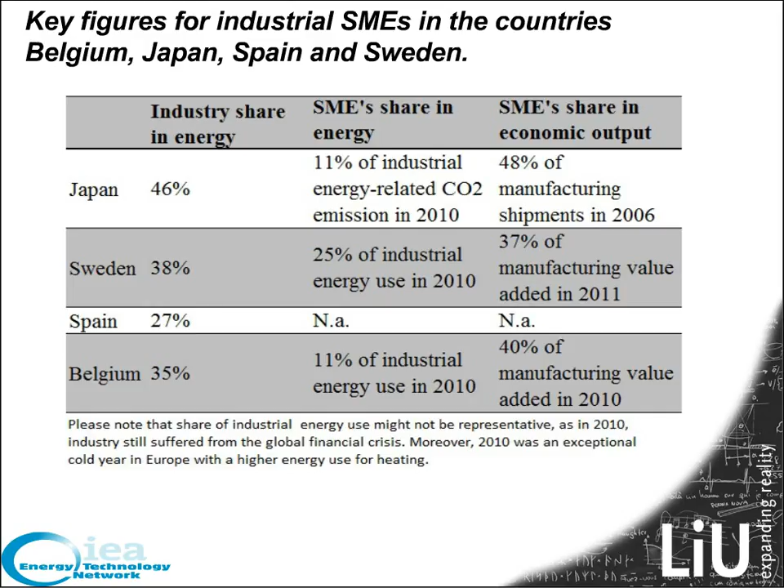So there is a great energy efficiency potential in industrial SMEs. It's even greater or larger than for energy intensive industry, even though the energy intensive industry in most countries has a larger energy end use. So the potential in SMEs is higher. That's what research shows. I have not provided you with a figure here.

We know that the European Commission states 25% in their action plan, and colleagues of mine have papers written in Sweden and internationally about various figures, but I will just say that it is high. But the potential is high, while the implementation of energy efficiency in industrial SMEs is not as high. So there is a discrepancy, a difference between the potential and the level of implementation or the deployment level.

This is something that is often missed in general, not only in regard to SMEs: we engineers like me speak about potentials and then assume that we can reach the whole potential, but research doesn't say that we can reach the whole potential. Normally in energy audit programs for SMEs, we can reach 50 to 60% of the potential outlined from the audit reports. But anyhow, there is a difference between the optimum level of energy efficiency and the level we have today, and this is what is called the energy efficiency gap.

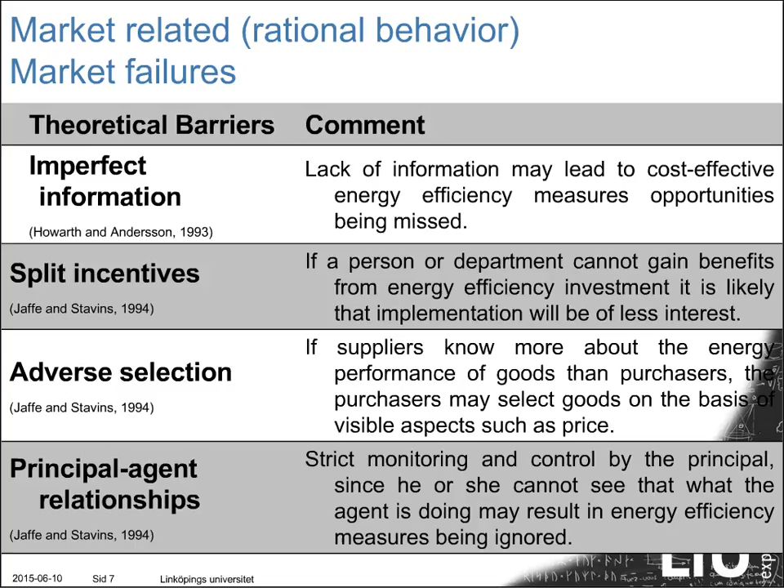Then we have a principal-agent relationship. If you allow me another example of you and me: if you're the owner of a company and don't really trust this CEO, which is me, because I put too much money on company partying and so on, you put in strict monitoring rules and say you're not allowed to take any investment above a 1 year payoff. This, of course, inhibits investments in energy efficient technologies. So those are the 4 market failure barriers in relation to improved energy efficiency.

If we go to the non-market related barriers, we have heterogeneity, which means that when we do a potential study of a technology, for example LED lighting, we tend to miss that the application for this technology is not applicable in all cases. This means that sometimes the potential level we state, based on a top-down calculation, is not as high in reality.

Then we have hidden cost, which means that when we undertake an investment, there are costs allocated to it which are not only the investment cost. It could be search costs for information, analysis of information, procurement, etc. Those costs can be quite high, and this is also a factor that can inhibit investments in energy-efficient technologies.

Then we have access to capital, a primary barrier for industrial SMEs. Not much to say about that - if you don't have money, it's hard to invest.

But the last barrier, risk, states that sometimes the lack of access to capital can be self-imposed, because industrial SMEs tend to be more risk averse than other larger companies. Also, sometimes when it comes to energy service companies, ESCOs, that make an agreement with an industrial SME, we have seen in research that it can be difficult for the SME to be credible towards the bank, because it's not the multinationals that come and ask for money. So the bank sometimes gives a neglect of allowing for the ESCO because of risk. This is also a barrier for energy efficiency.

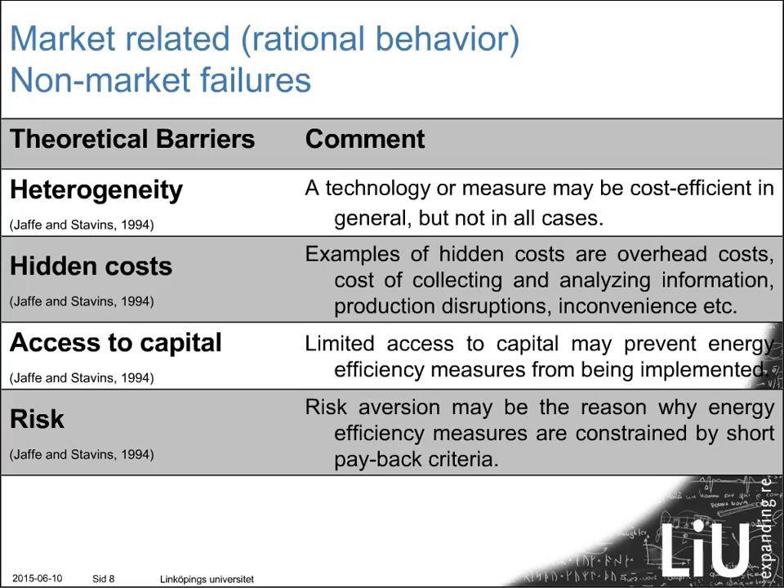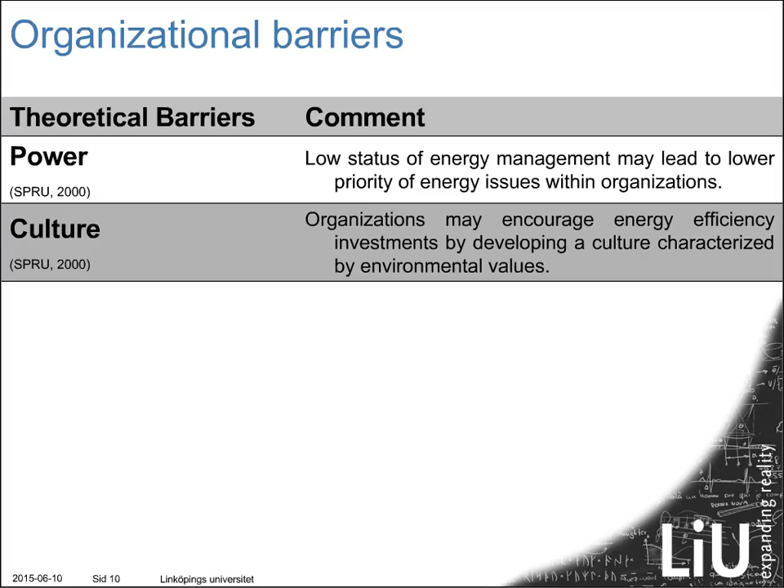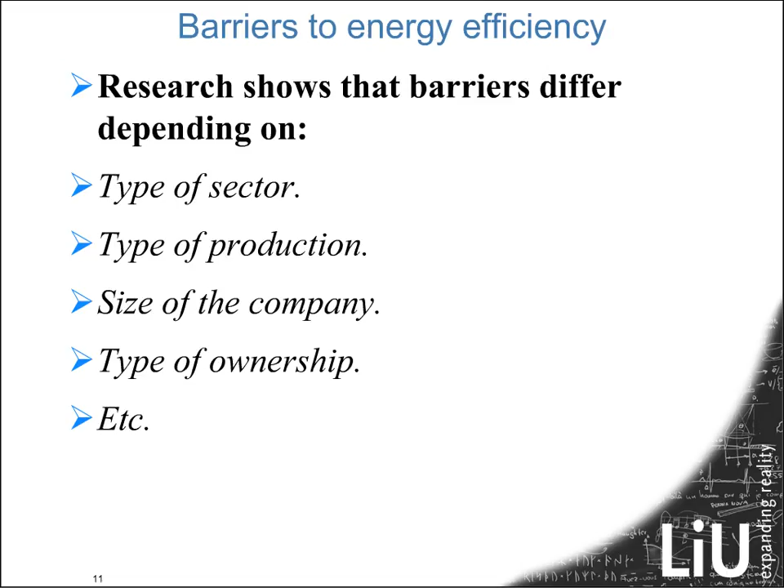So that was the theoretical barriers for improved energy efficiency. Now, I could provide results from various papers from international colleagues and ours here in Sweden, but I'll just summarize that research shows barriers differ a lot, depending on sector, type of production, size of the company, and type of ownership. I have still not seen a paper, and it could be lack of knowledge on my part, that summarizes the key barriers, period, for industrial SMEs. They tend to differ.

Before we leave the barrier part of the webinar, I want to mention something about energy efficiency in core business. From a Swedish perspective, the core business notion came into industry about 25 years ago. What not so many know is that the core business focus is actually based on a research paper by two American researchers back in 1991, stating that if we are to improve and succeed in our company, we need to focus on our core business. In relation to core business, improved energy efficiency in a manufacturing industrial SME can never, per definition, be core business, because it does not create any revenue.

This doesn't mean we can't put it on top of the agenda, but we have seen that this strong emphasis on core business can sometimes harm improved energy efficiency in a company, because parts that are not core business can be outsourced. And if you outsource one key person who knows the technical energy system, we have a problem improving energy efficiency.

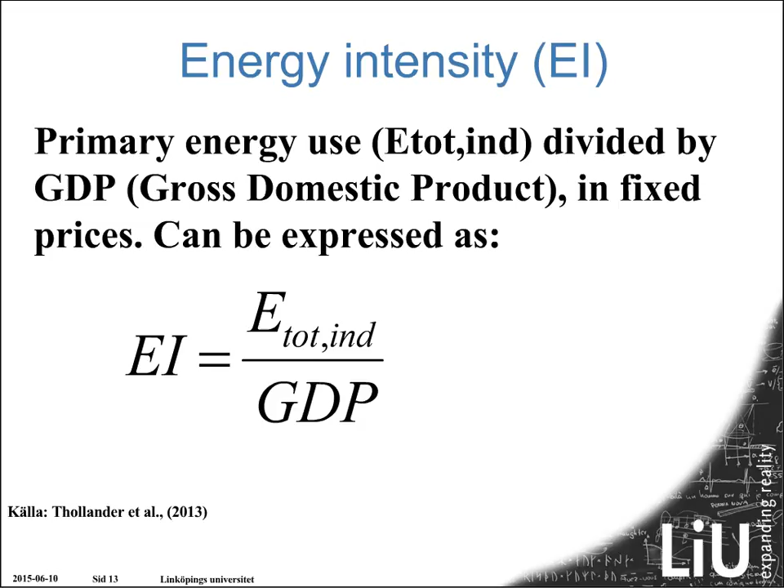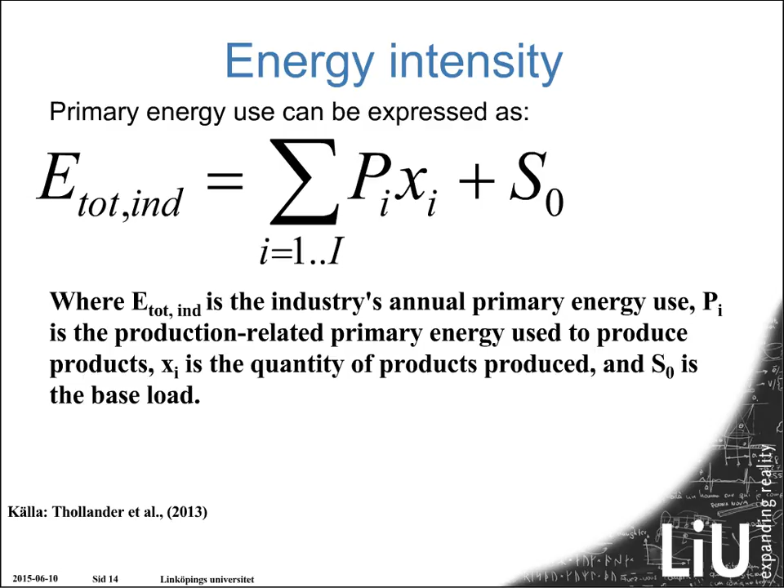And if we look on the total energy use, we can exemplify this by a simple equation, and don't be shocked by the numbers. It basically means that the industrial energy use is the production process energy use per product, and then we have a term S0, which means all the support processes.

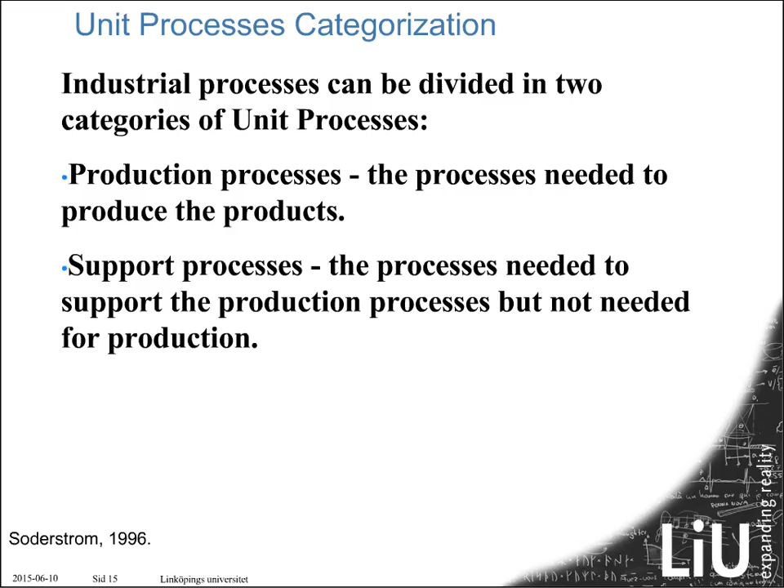And when looking into this type of categorization, the production processes are the processes needed to produce the products, and then we have the support processes, which support the production process.

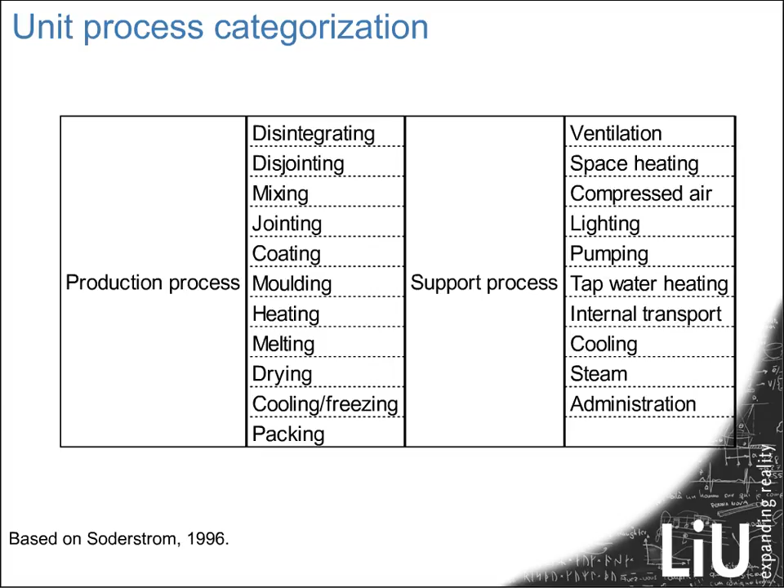And this categorization can look like this, where on the support process side we have a number of defined support processes, and then we have theoretically tried to make a list of typical production processes. I don't want to give emphasis on this, but just show that we can categorize the various types of processes in a company, and that the energy use of a company is both production processes and support processes.

If we look here, we have an engineering company, an SME, and on the very top part of the figure we see that metal cutting, CNC machines, is about 22% of the total energy use. And then we have the phosphate finishing at 1%. So in this company, the total annual energy use primarily consists of support processes.

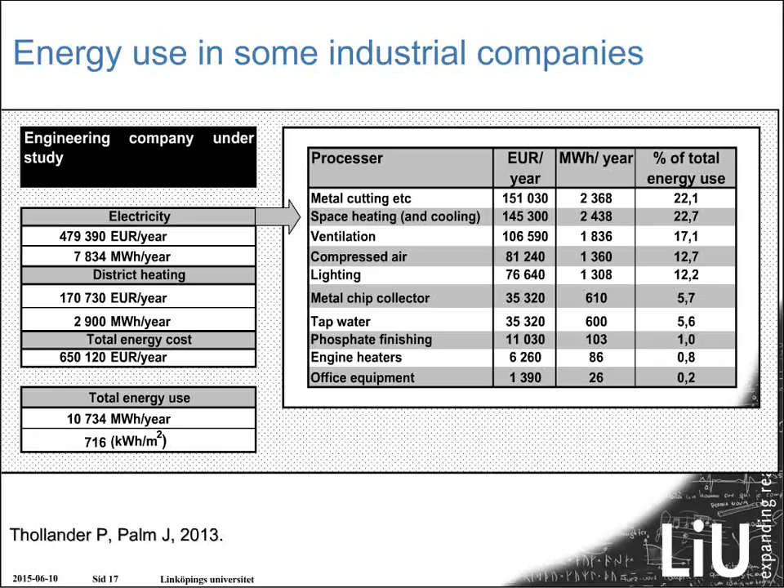If we look at a quite energy-intensive SME here, a foundry, we can see that about 50% of the annual energy use is from the support process, and about 50% is from the production process.

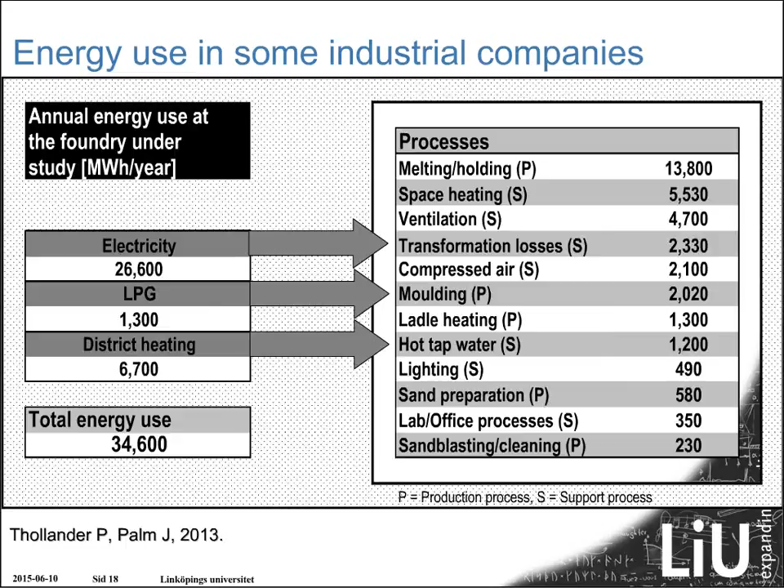And even though not on topic for today, we can see here an energy-intensive large pulp mill, a chemical pulp mill. We have the evaporator, the drying, the digester, and then others. Others is the only category in this paper where we have the support process.

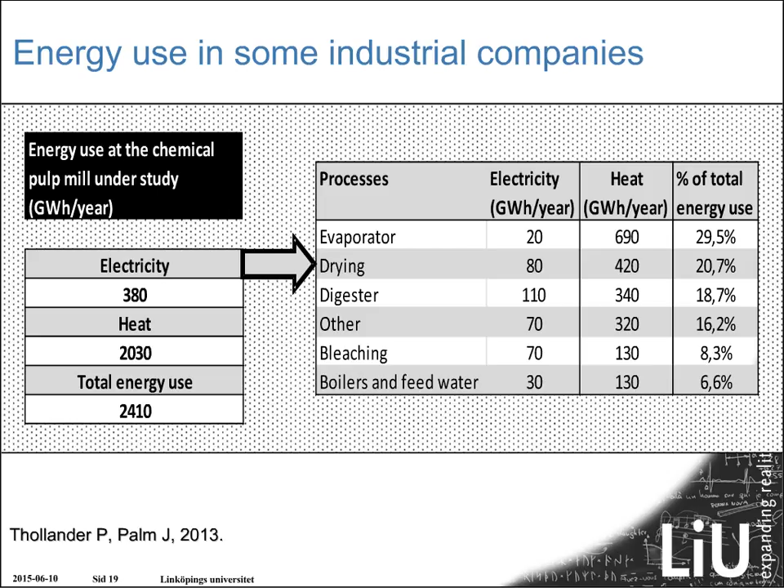So, having said that, if we remember the equation Px plus Sx, when the Px differs, the approaches also, of course, should differ. And I put in a little citation there, that we've succeeded in categorizing insects and plants and so on, but still categorization of industrial energy end use, which is, in my view, far less complex than nature, is still unexplored by us.

And in order to make an improvement in this regard, there should be a general taxonomy developed that could be applicable for industrial SMEs. Since there is a lack of this, we cannot compare data between countries and not even between regions, because the energy audits in one part of the country categorize one way, and auditors in another part of the country in another audit program categorize in another way.

So for today, I just want to emphasize that we need to develop a taxonomy in the future for how to categorize data. And because this data is lacking today, we have little knowledge actually of how much energy is used for industrial SMEs, for the production process, and for the support process.

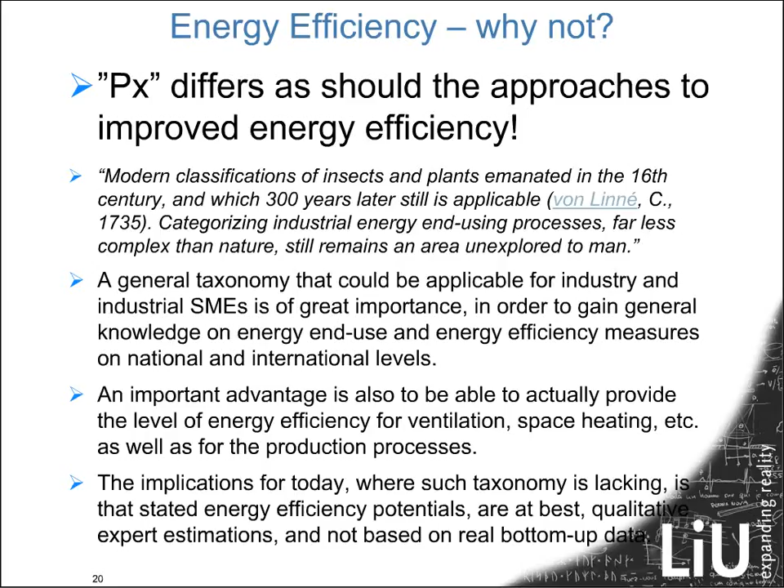And this means also, if you remember my first slide on potentials, we cannot really say how high the potential is, because we're lacking energy end use data, and we're also lacking implementation levels for various types of technologies. And this, of course, if you agree with me, we need to make a change in this regard. So let's aim for that in the future.

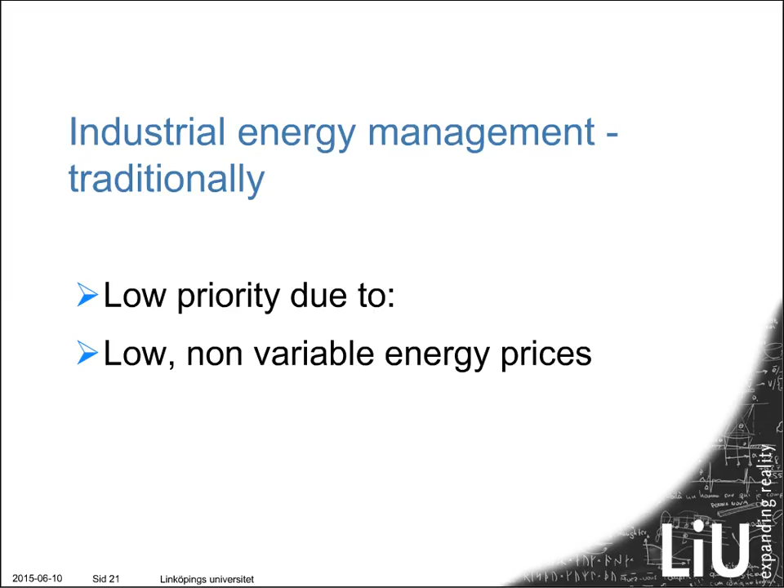So if we proceed on energy management, we can say that traditionally it has received low focus because of low, non-variable energy prices, and also that energy cost is in fact a quite small portion of the total cost for an SME. But today we have increased priority thanks to rising prices, even though that might not hold right now.

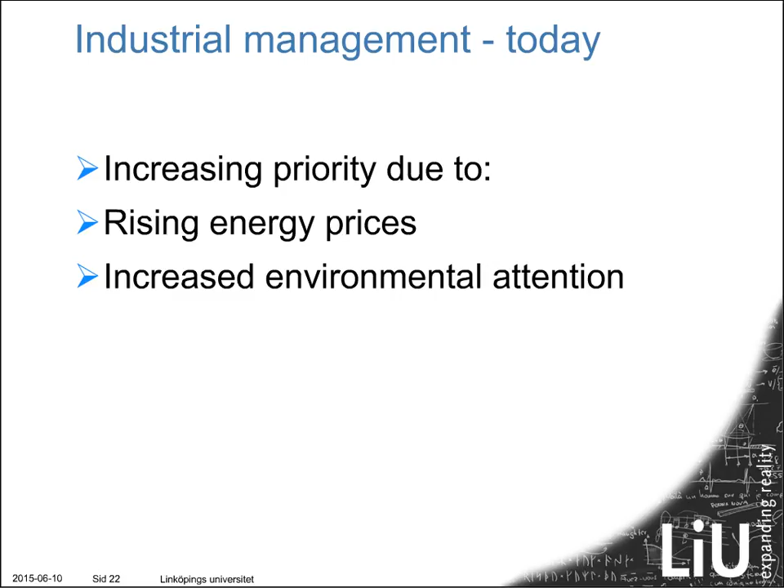We've seen historically rising prices, also increased environmental attention, and the adoption of public policy instruments, and also the new standards that have now risen, starting with Denmark, continuing with Sweden more than 10 years ago. We now have an international standard, ISO 50001.

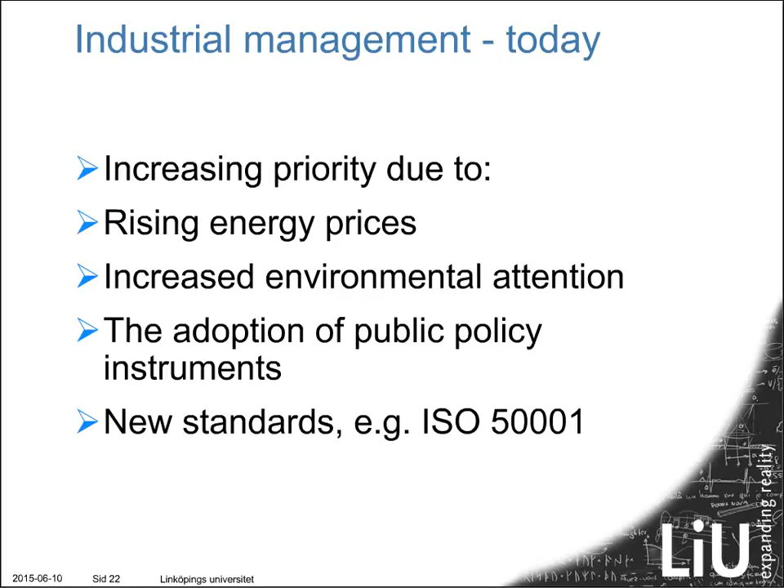Energy management is one of the foremost means to eliminate barriers to energy efficiency. There is not so much research done in this regard—about 40 to 50 internationally published papers in this area.

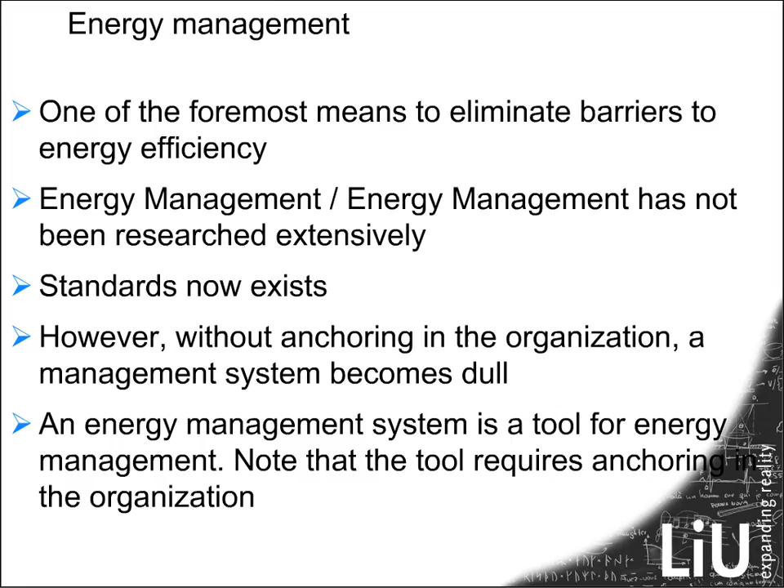We have standards, as stated in my previous slide, but please note that without anchoring in the organization, a management system becomes quite ineffective. I'd like to emphasize that an energy management system is a tool for improved energy efficiency by leadership and energy management. As an engineer, I often see this simplification: yeah, but we have an energy management system. This doesn't mean we have a good, successful organization working with improved energy efficiency—it just means we are certified. So please distinguish between an energy management system and successful energy management.

I will now give you an overview of about 10 years of research, and this is definitely not rocket science, but bear with me. These are very simple steps on important factors for successful energy management—not only energy management system implementation, but successful energy management in industrial SMEs. It's a sample of about 250 case studies over about 10 years.

First, we need to conduct an energy audit. If we haven't done an energy audit, it's like a controller setting a budget for the coming year without having any history of last year—it's basically impossible. In my own experience as an auditor, when I go out to companies, they want to have measurements on the production equipment.

But when we end up presenting the audit for industrial SMEs, we see that the major energy use is actually found in the support process. This is not always the case, of course, because the process can be very large. But it's very important to have an audit as the first important step.

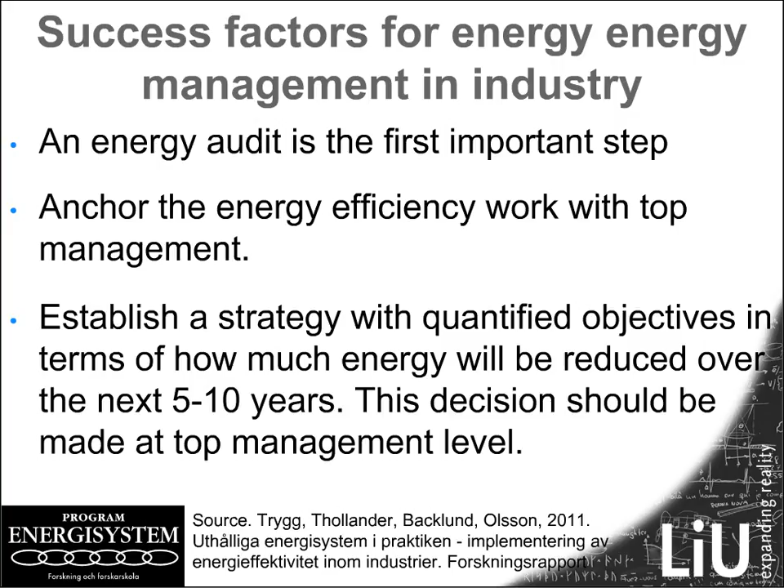Successful companies have the energy efficiency work anchored within top management. It's also important to have a strategy with quantified goals of how much energy you'd like to reduce, or how much you'd like to improve energy efficiency over the next 5 to 10 years. This decision needs to be taken also at management level, so you have top management commitment there.

Then you need an action plan on how to meet set objectives. Successful companies often have a long-term action plan, several years, and a short-term one, maybe 1 year or so. And then we have a position that takes charge of the energy efficiency issue—a clear owner, an energy controller. This doesn't mean a full-time energy controller, because for most industrial SMEs that's way too costly. But someone needs to be put as owner of the issue and carry this responsibility.

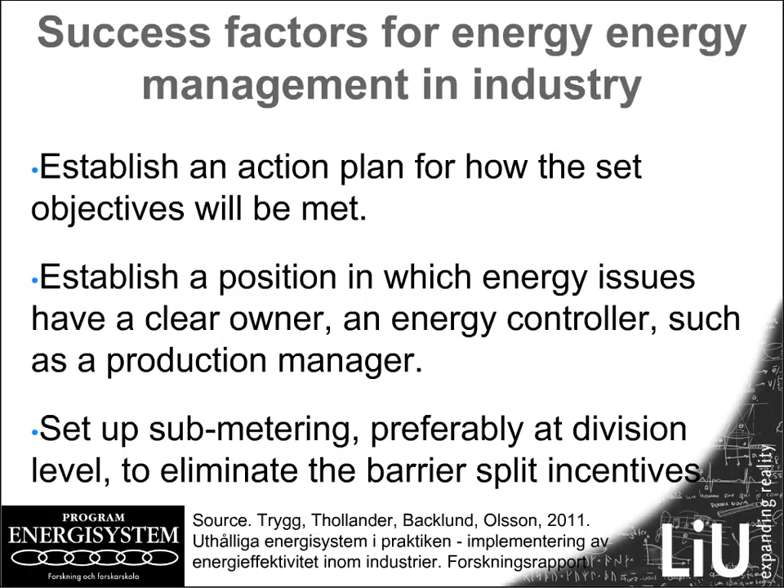It's important to set up sub-metering, preferably at division level. Remember my example of you being the CEO and me being the division manager—it's very important to allocate energy cost based on sub-metering, not only on square meters or number of employees for your division. Otherwise, the only way for me as division manager to save energy cost is either to reduce my square meters or fire people to reduce my energy bill, which, yeah, I don't have to say anything else—it's just basically not a good idea.

We've also seen that successful companies have established personnel responsible for the issue at each shift. This means we create momentum in the issue. So when there's a shutdown of production, this person can call the energy controller and say, please shut off the ventilation now for 4 hours—we don't need 100,000 cubic meters of air per hour for ventilation, we can reduce that to a minimum.

Ongoing training is also important. Preferably we start with some of the key persons in the company, and then continue, if needed, for the whole industrial SME. It's also important to visualize the work—I have one example from the real world.

My apologies to the men listening, but there were a few old guys in a company's melting division who didn't shut off the melting and holding furnaces. So the energy manager was quite upset, but they didn't listen to him.

So he started to visualize the work on the intranet, showing energy efficiency as energy use divided by ton of melted metal. This meant the bar was infinite in July, when we have vacation in Sweden. By visualizing this, the energy manager succeeded in the third year in convincing these guys they should shut off the holding and melting furnaces when they went on vacation.

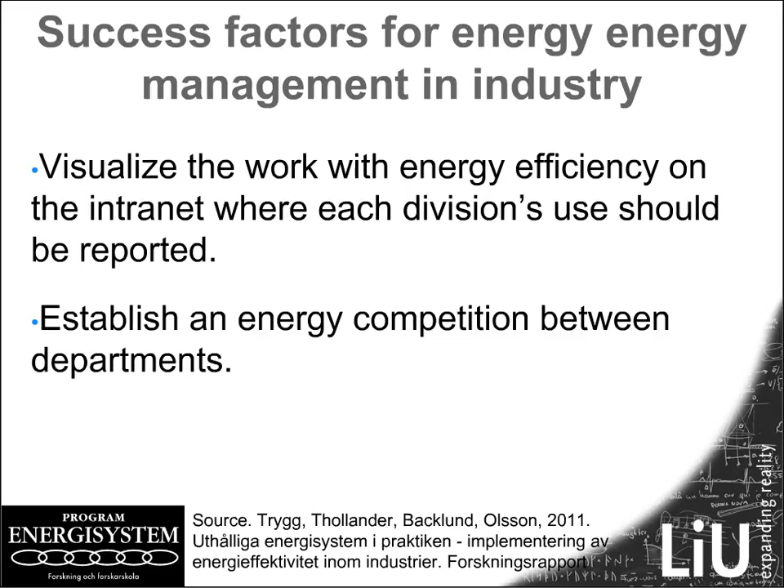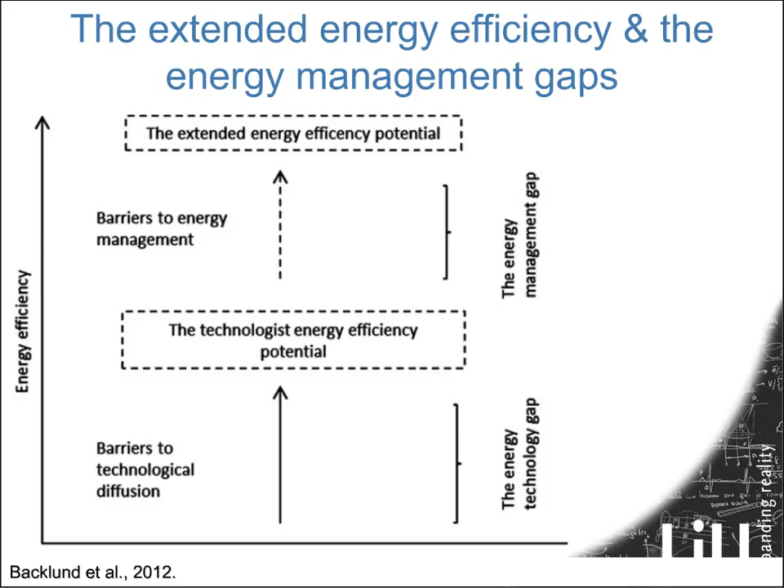We have a number of important components when setting up an energy policy program for SMEs. We need to set program goals: how many SMEs do we want to reach in a 4 or 5 year period, and how much improved energy efficiency do we want to see? Then we need to take care of the laws and that framework, what type of subsidy we should have, and how we should promote and market this policy towards the SMEs.

Then we have the structure of administration: what are the key players, and what energy audit models are we using? For example, looking at the standards originating from ASHRAE, there's the categorization of level 1, level 2, and level 3 audits, depending on the depth of the audit.

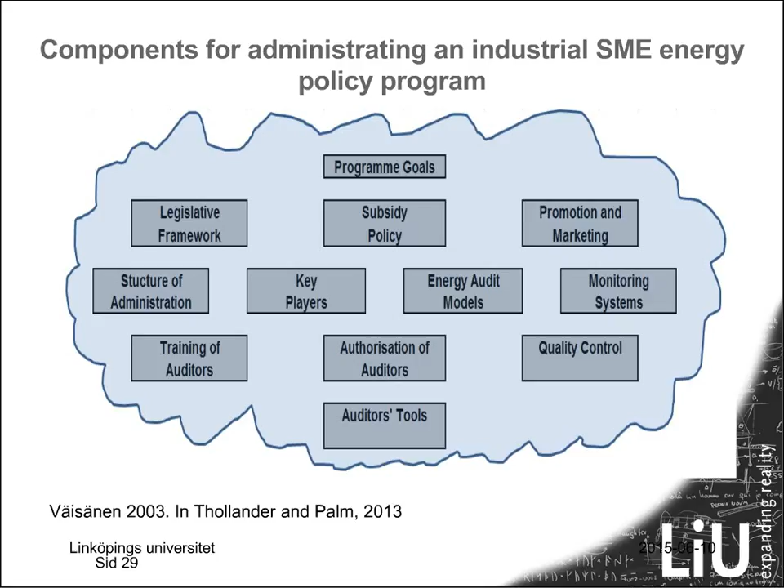Then we have the monitoring system, how we'll do the follow-up of our policy. Then the training of auditors, which is of key importance. Then the authorization: how will we authorize the auditors in the policy program? Then quality control, and various tools for auditing, such as databases, etc.

For successful programs, you need to ask: should we have fully or partly subsidized energy audits in the program? This is partly answered if you're within a European country, where we have rules and regulations from the European Commission, but it's still an important question to ask in the setup. Then there's scope: should we have level 1, level 2, or level 3 audits? That's also important to ask in the setup.

Then, what type of sectors will we target? A few years ago I would have said the cost effectiveness for industrial SMEs is a lot higher for energy audits than for the service sector. But later research shows it tends to be more related to the actual energy use than whether it's the industrial sector or the service SME sector.

Then, should we have an energy audit program for the SMEs, or a long-term agreement or voluntary agreement? And then the choice of operating agent and local authority involvement: how can we anchor the program with local authorities? In Sweden, we have municipality energy consultants that provide advice to consumers, which is one way of involving them in the program.

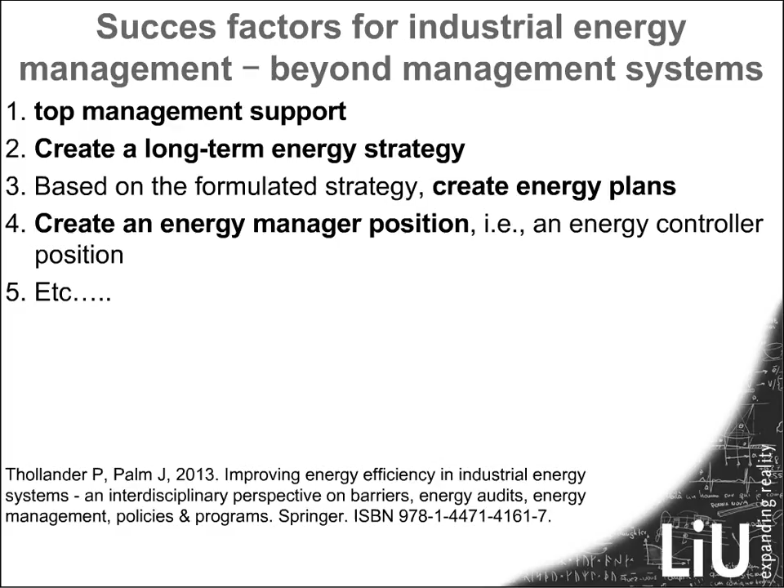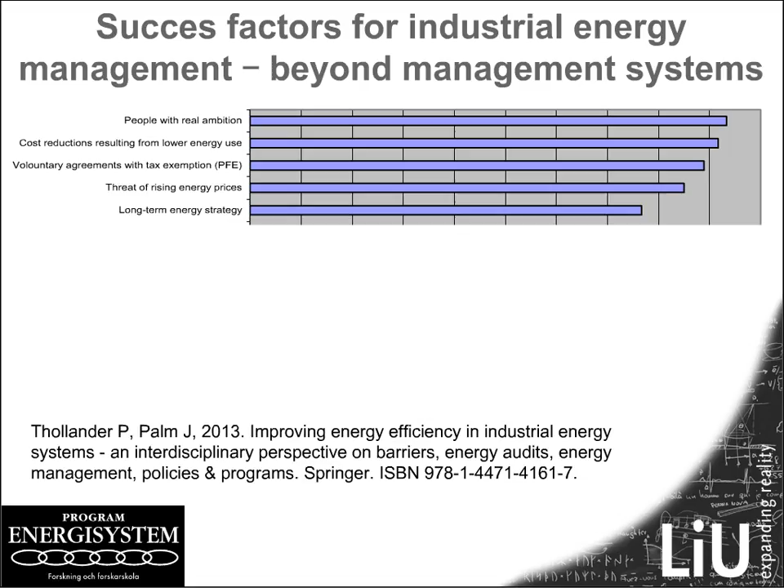Just a little reminder, the success factors for energy management. And then just a few examples of important driving forces where we asked industrial SMEs about important driving forces.

And they state ambition and cost reductions are important driving forces, but few SMEs have successful energy management system approaches. And here we have a great challenge for government, etc. That is to approach an actor who is sometimes both the production manager and the CEO, and his or her everyday life is quite the avalanche. We don't know 3 weeks from now if we will have the order accepted and can proceed, or otherwise we have to fire personnel in 3 months, etc. So the stability of an SME manager's environment can be quite hard sometimes.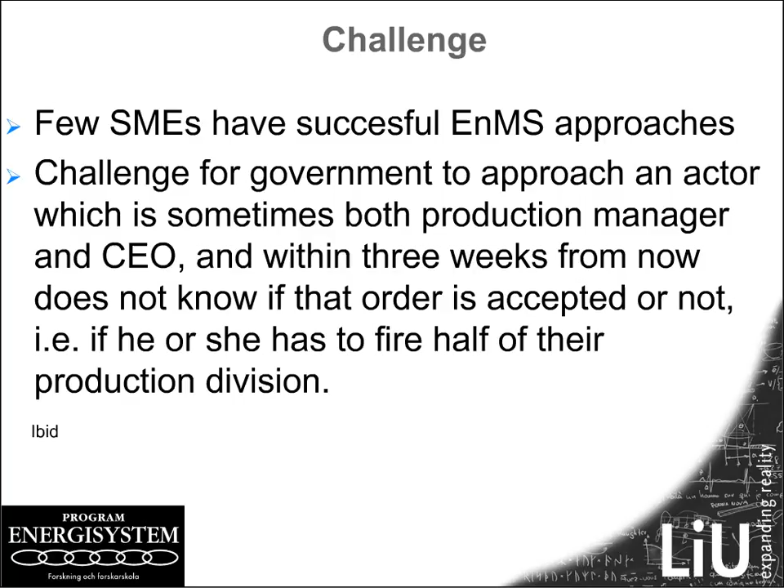So when we set up an energy policy program for industrial SMEs, the knowledge we have right now is that we are primarily targeting support processes. However, this figure can contain a bias. I need to mention that we, as auditors, are not often experts in the production process, which means we will propose less sound measures for that production process. As an auditor, you're often an expert in the support process, etc. This needs to be mentioned also.

So in summary, yes, production process audits can also be important, but for SMEs, please start to look at the support processes.

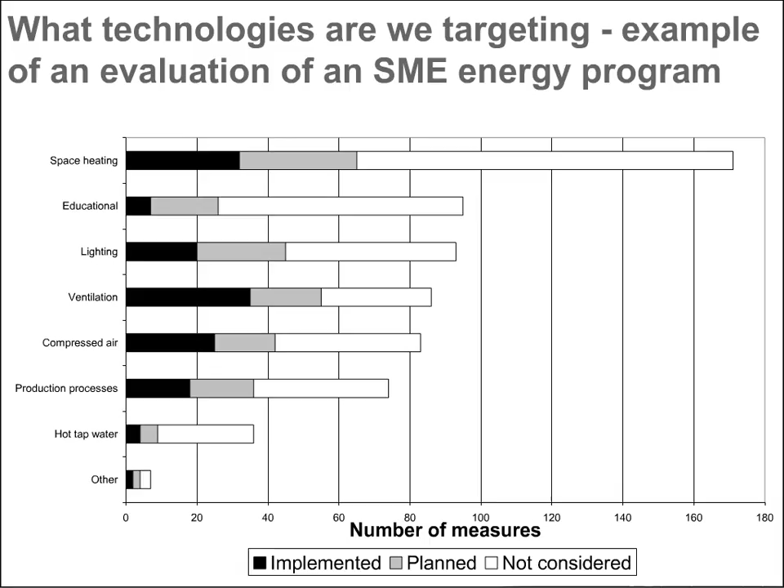But when it comes to management, we have a constitution in most countries in the world where we have some sort of market economy. This means we have given companies the power and authority to themselves operate and work with, for example, improved energy efficiency, setting a strategy, etc. This means that the potential for policy, when it comes to also involving energy management components, is actually not as high as the potential when it comes to both technology and management. And that is because we cannot force companies to take measures, because our constitution gives them freedom to do so or not.

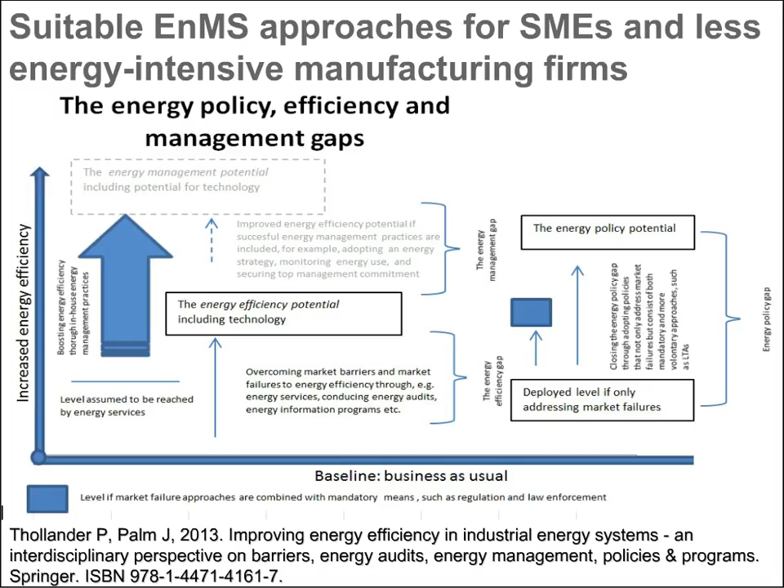So some successful types of policies, informative policies, often form the backbone in various countries for industrial SMEs, and that holds in particular for energy audit programs.

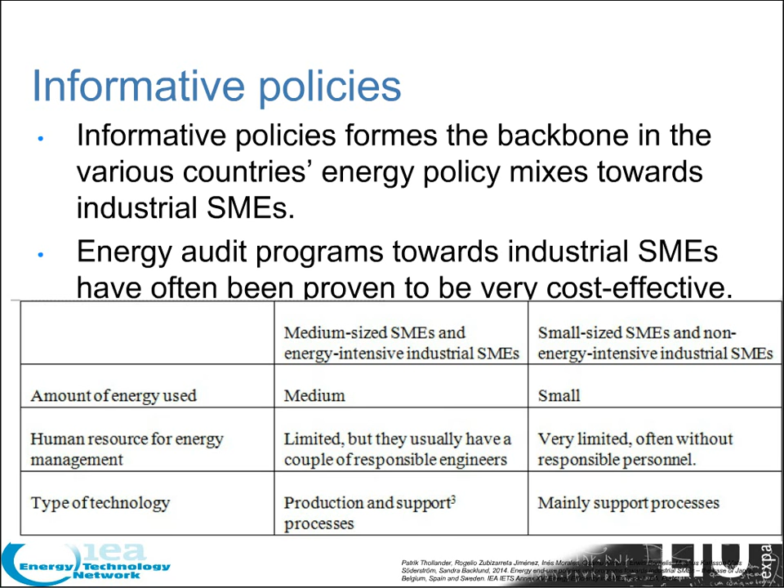While if we look at small-sized and non-energy-intensive industrial SMEs, the share of energy use is small. They have very limited human resources for energy management, and the type of technology regarded is often support processes.

Administrative policies for SMEs - this is based on current scientific knowledge in this area. We can see that law enforcement is a good policy for medium-sized enterprises, and that is based on the Japanese experience with the energy conservation law.

In regard to policies in Belgium, Spain, Japan and Sweden, the governmental officials enforcing the law are sometimes not as experienced in energy efficiency issues, and this is a problem with this type of policy. Then we have economic policies, which can include program subsidies.

It can be voluntary agreements or long-term agreements. We have tax deductions, and those are often merged with informative policies. The level of subsidy has large implications on the cost effectiveness of the policy. There is very little research on adequate levels of how much we should subsidize an audit in order to have success.